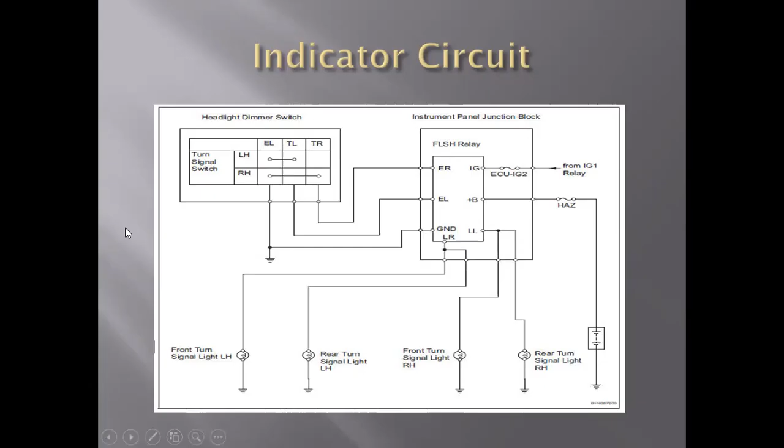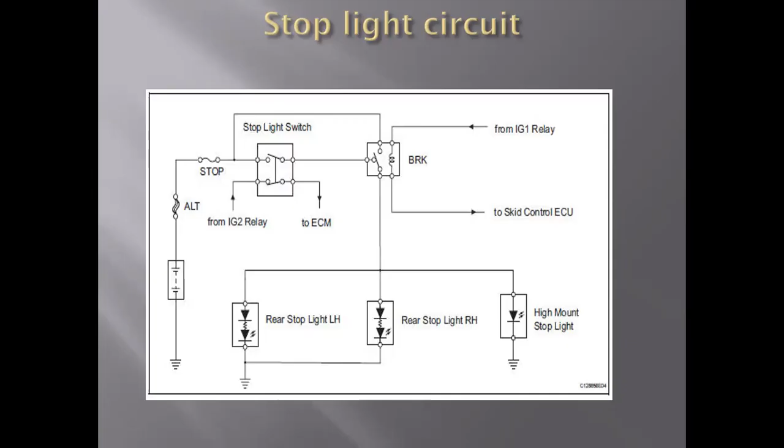Right? So this circuit and this system also helps with the anti-skid control unit, and the transmission for shift lock control.

So you see shift lock control down here. So information goes to the ECU for shifting lockup and of course release, and also for the anti-skid. And like we said, it's also used for I-stop application.

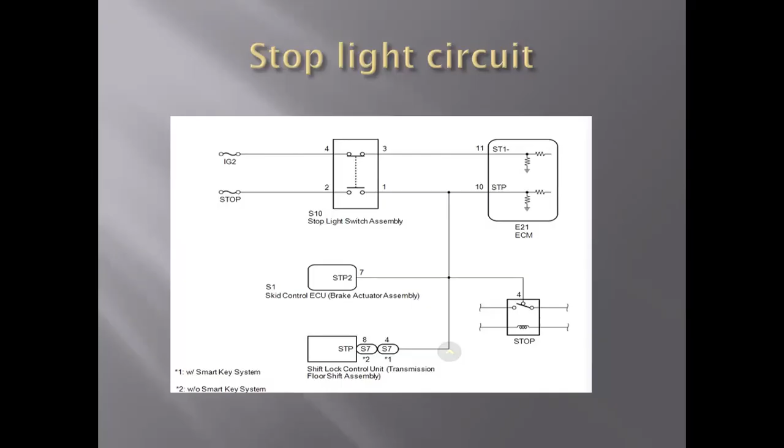Start and stop. I think it's the I-stop.

Okay, so this is your horn circuit. It's pretty much a straightforward circuit, just the same. You have your source, your main element, your control, and your output to the horn.

So for application with the supplementary restraint system, your SRS, more commonly known as the airbags, then you will have the horn.

Coming through the spiral, the horn circuit coming through the spiral. So this is where you would do that check.

Check to see if the problem is downstairs or upstairs. So right here is your horn button, horn switch, coming through the spiral cable and going to the relay.

So if you block this out, once you apply this, once you press it on, then you should get on this leg of the thing.

So like I was telling you, with the different types of relays, this number you have 1 and 2, and you have 3 and 5 as to the other relay. So this would be your input to the relay from the spiral.

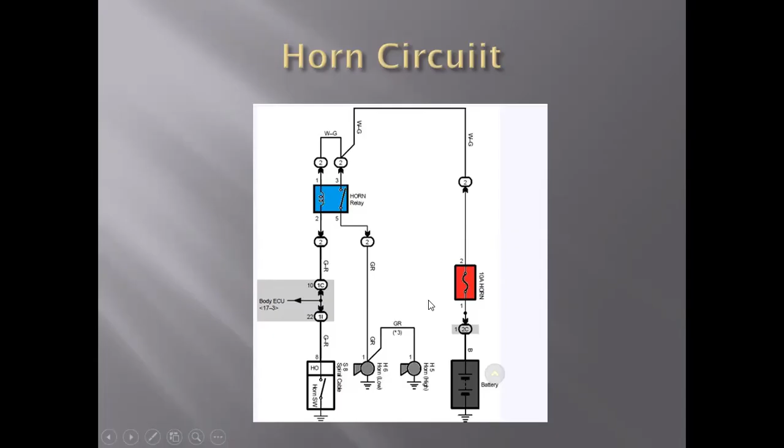Like previously with the alternator system, the starting system is pretty much the same. So the voltage drop across is the same.

It's to investigate any possibility of high resistance within a circuit or a group of circuits or a number of circuits.

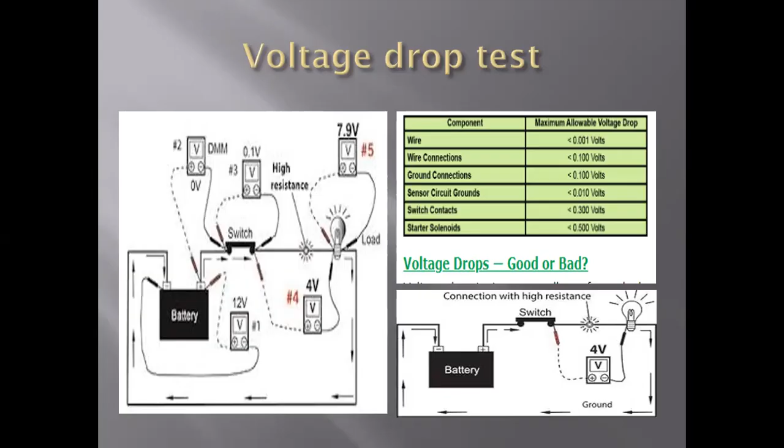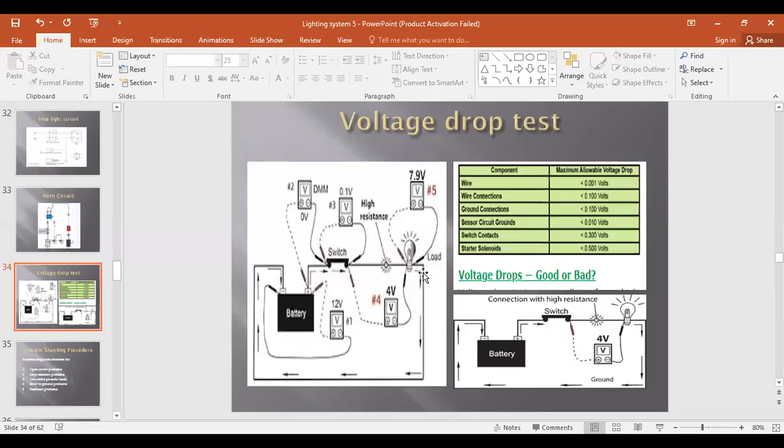I don't think these are right because them have volts. Bring this up for me. I want to see clear with that volts, with them volts. Yeah, yeah, and follow you. Okay, so is my eyes not working good?

It's perfectly okay. So this is 100 millivolts, right? For ground connection it's 100 millivolts. For sensor circuit ground, it's 10 millivolts, just the same. For switches, switch contacts is 300 millivolts, and for starter solenoid it's 500 millivolts.

And of course, like we said, you would also have to check the specific recommendation for the specific application.

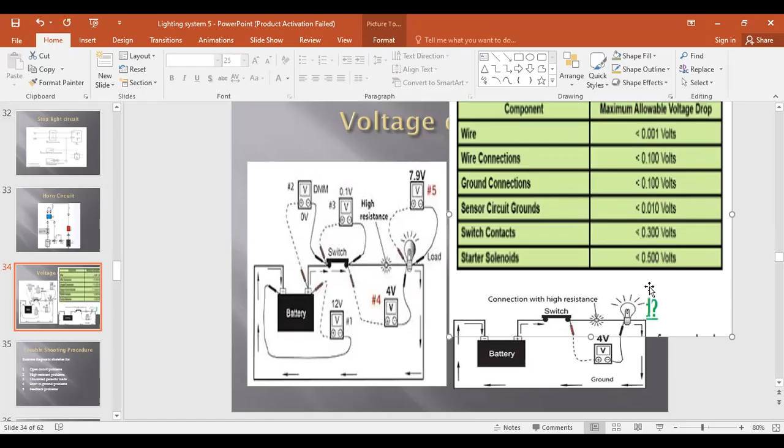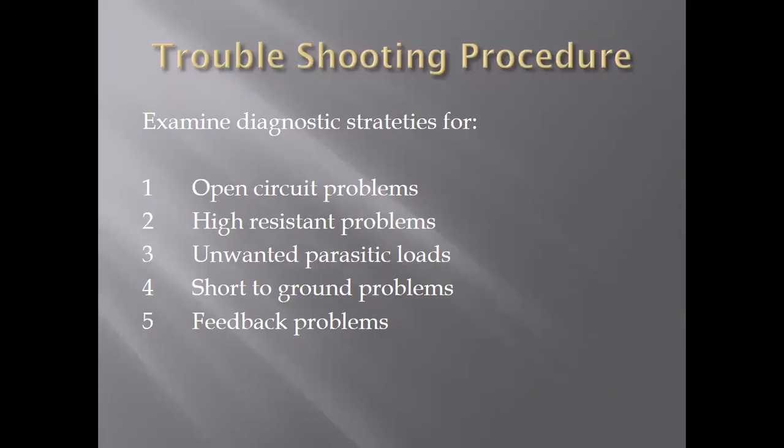All right, so for the troubleshooting procedure, examine the diagnostic strategy for open circuit problems, high resistance problems, unwanted parasitic loads, shorted to ground problems, and feedback problems.

Okay, so what this essentially tells you is that first you must verify the customer's complaint, right? So you will have to do a test to ensure that what the customer is explaining to you is what is actually happening, because sometimes...

All right, so first we verify the customer complaint, and then we determine the related symptom. We then analyze the symptoms, and then we isolate the trouble, correct the trouble, and then we check for proof of operation.

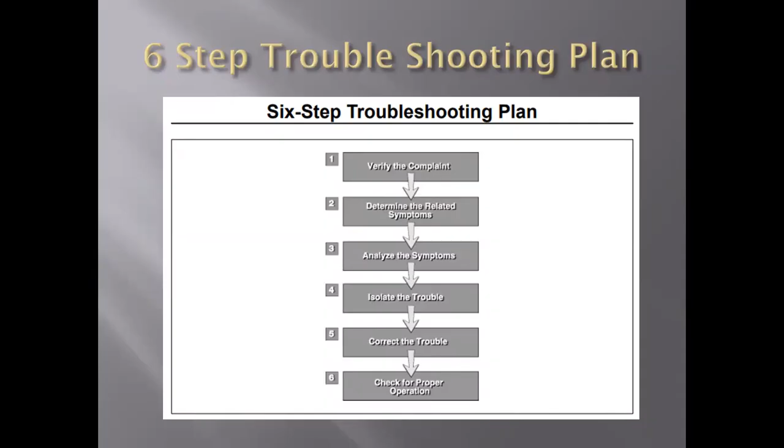The objective is to determine what needs to be done to verify the problem, check the component for related symptoms, use circuit trace technique to analyze symptoms to determine problems for diagnosis, use EWD to isolate the problem, and use repair techniques for wire, terminal, and connectors.

Step 1: Verify customer complaint. Identify what the customer is describing. Is it a problem? Is it intermittent or continuous?

Sample customer complaint: stoplight does not work. Step on the brake pedal and look at the brake light. The problem happens every time the brake pedal is depressed.

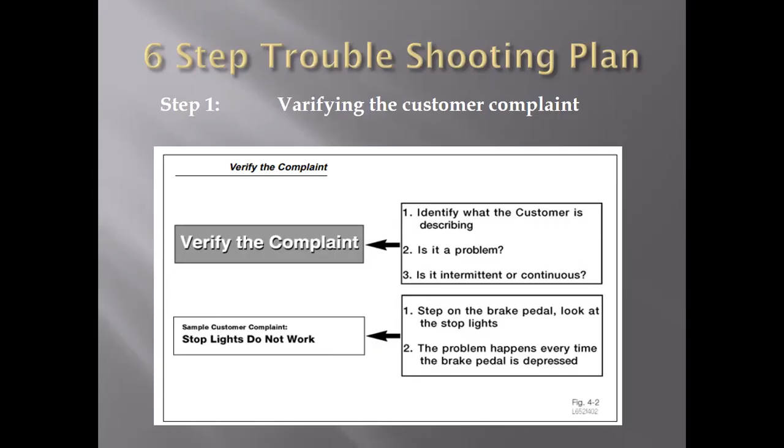Step 2: Determine the related symptom. Most electrical circuits consist of two or more loads connected in parallel. Different circuits are related to another circuit by parallel connection to a common power source, fuse, or ground point. Check sensors or switches where a single switch operates a number of different circuits, such as the left front door courtesy light operating both the interior lighting and the key warning buzzer circuit.

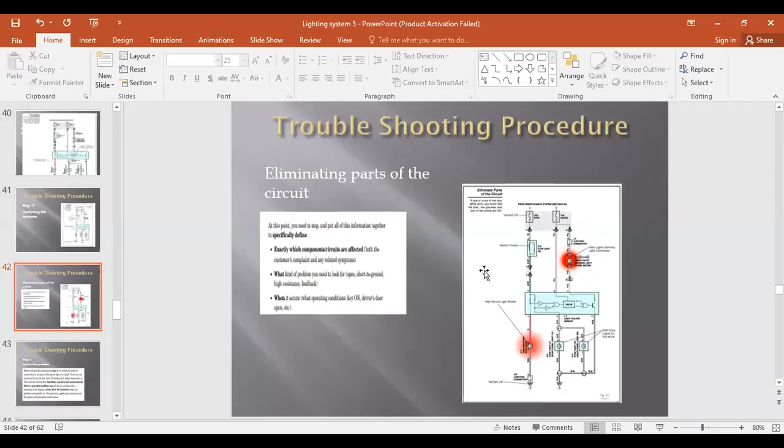Isolate the problem. When analyzing the symptom in step 4, you trace the path of current flow in the parts of the circuit that are good. You will now see sections of the circuit that have no trace on them - places where there is no confirmed current flow. Anywhere you have no trace current flow is the potential problem area.

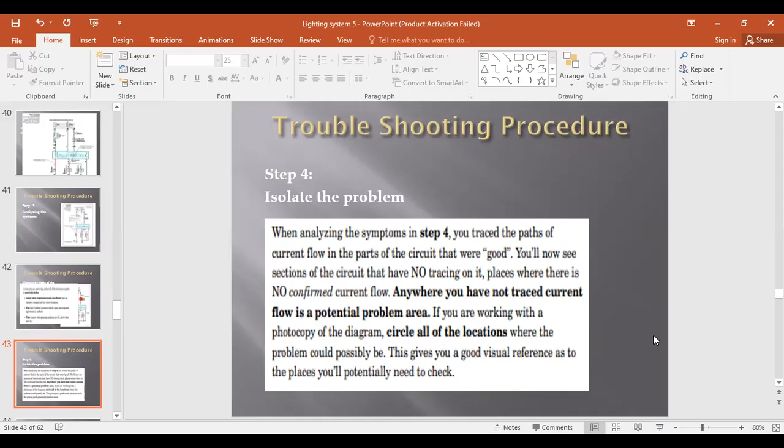If you're working with a photocopy of the diagram, circle all the locations where the problem could possibly be. This gives you a good visual reference of the places you will potentially need to check. Basically, you're going to look at the diagram and trace it for the problem area, pinpointing those areas. Look for connection numbers, look for color wires, and trace all the way through to the end, checking for any deviation in the voltage or the source at that point.

To isolate the problem, there are three actions you need to make: one, on the wiring diagram find the areas that are possible problem areas; two, determine where to begin making the checks; and three, make your inspection.

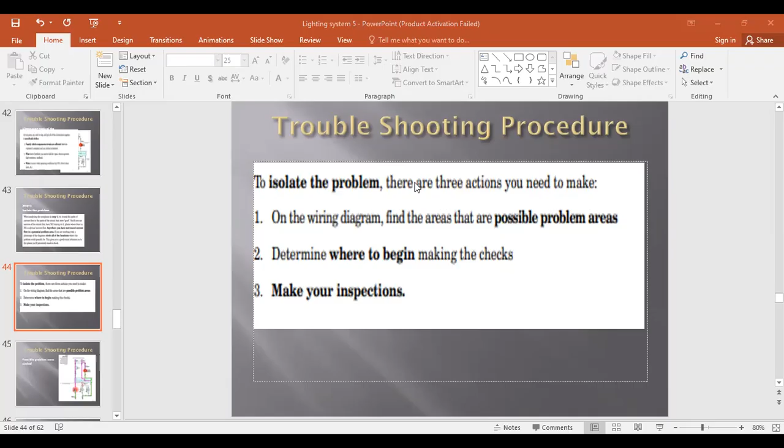Troubleshooting procedure, step 5: correcting the problem. This may be repair or replacement of components, wiring, service connections, or connectors, terminals, and ground points.

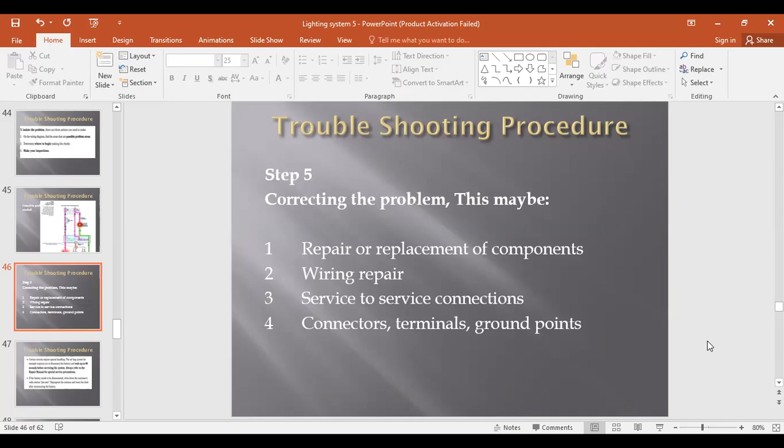Certain circuits require special handling. The airbag system, for example, requires you to disconnect the battery and wait up to 90 seconds before servicing the system. Always refer to the Repair Manual for specific service or special service precautions.

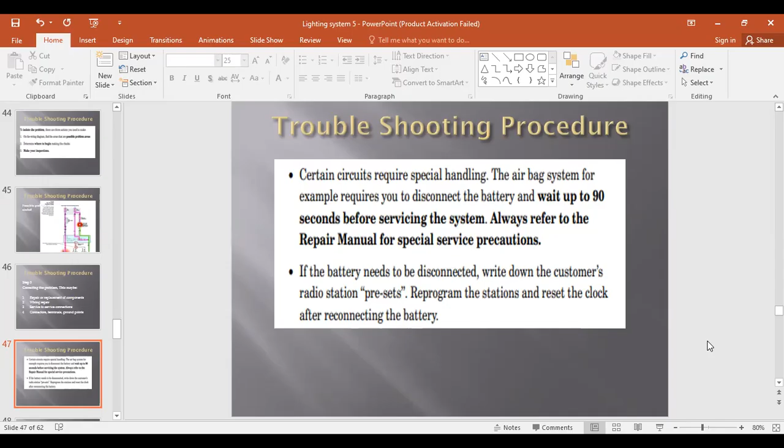If the battery needs to be disconnected, write down the customer's radio station presets and reset the clock after reconnecting the battery. I would strongly recommend that before disconnecting the battery, you check to see if the radio has any security or coding feature you will need, or you might need to add a power source to maintain that before disconnecting the battery.

After making the repair, you must verify that the problem was actually fixed. Operate the circuit as thoroughly as you did when you first looked at the car, making sure all the functions and features of the circuit are working properly. Sometimes a circuit has a simple problem; sometimes it has multiple problems causing it to be complicated. This recheck of the circuit ensures that the customer will be satisfied. A satisfied customer means they will return to the dealership for service and tell their friends about the experience too.

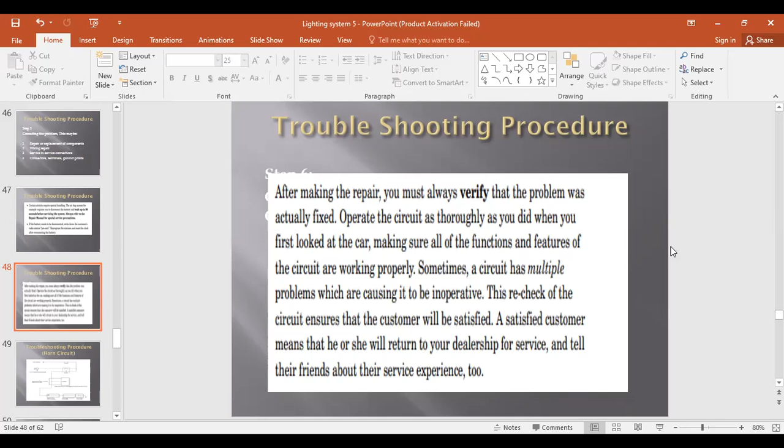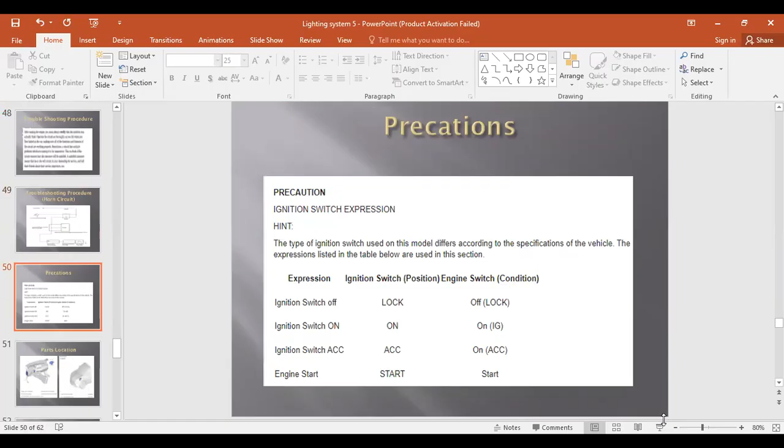Precaution: ignition switch expression. The type of ignition switch used on this model differs according to the specifications of the vehicle. The expressions listed in the table are used in this section: expression, ignition switch position, engine switch, and condition. For ignition switch off, the steering is in the lock position, and the engine switch condition is off.

Ignition switch on, steering lock on - expression is ignition switch on, engine is ignition on. For expression ignition switch accessory, accessory is on for engine. For startup, engine start - engine condition is engine start.

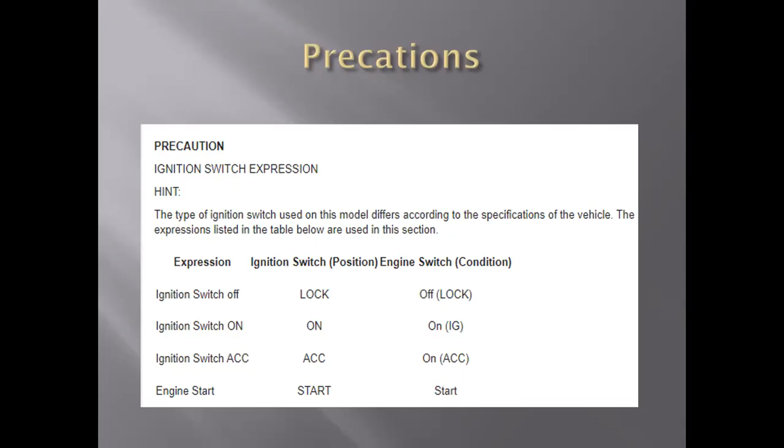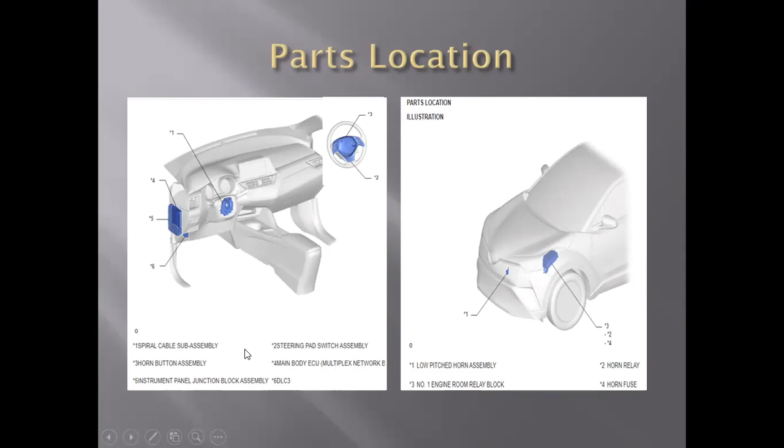There are some parts locations. For one, we identify our spiral cable subassembly. Two is your steering pad switch assembly, and three is your horn button assembly. Four would be your main body ECU, which is your multiplex networking, and five would be your instrument panel junction block assembly.

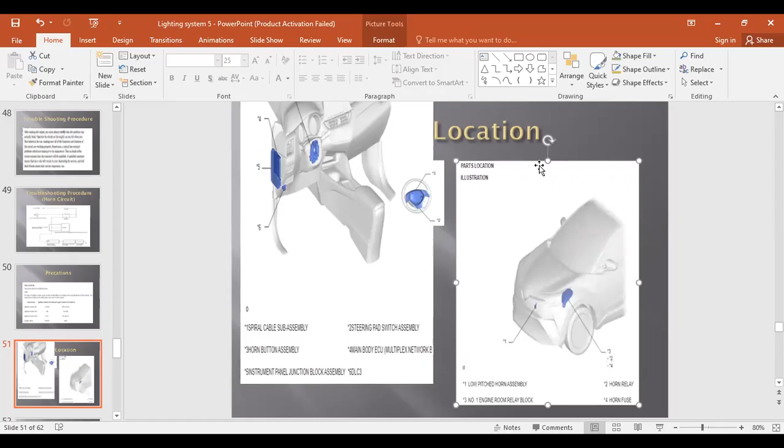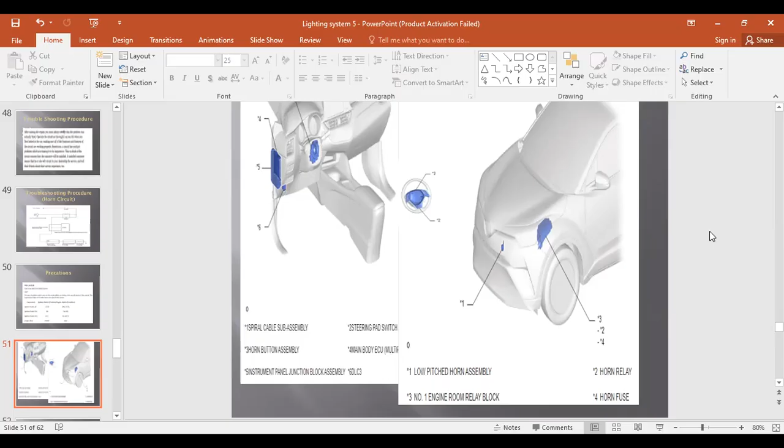On the other side now, we have the low pitched horn assembly, and two is your horn relay, three is your engine room relay block, and four is your horn fuse, which is incorporated inside the fuse box.

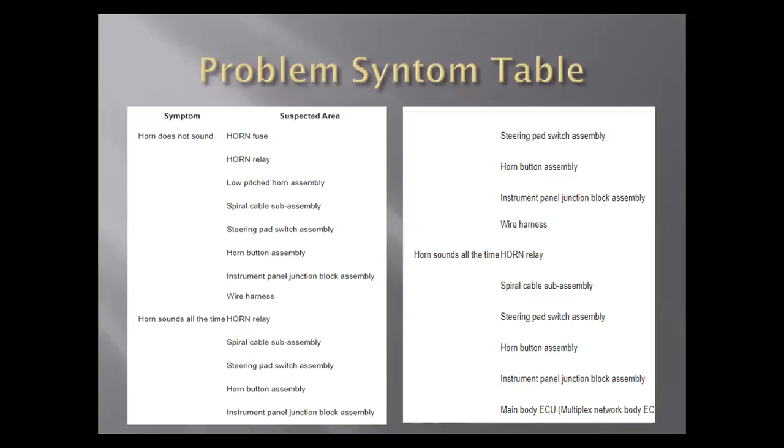Okay, so symptom and suspected area: if the horn does not sound, it could be fuse relay, low pitched horn assembly, spiral cable, steering pad assembly, horn button assembly, instrument panel junction, block assembly, or wire harness.

If horn sounds all the time, it could be a relay, spiral cable, steering pad, horn button assembly, instrument panel junction block assembly, sub assembly, switch assembly, main body ECU, or multiplexing network body ECU assembly.

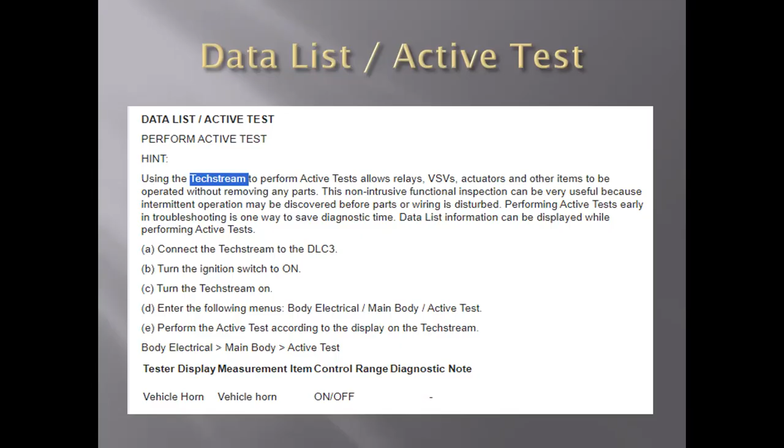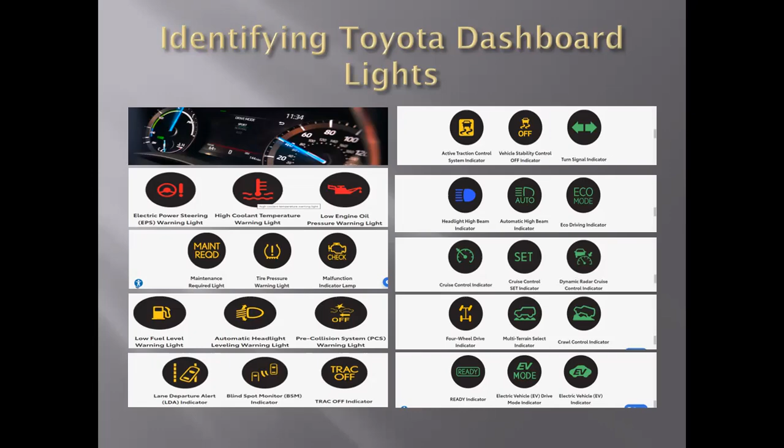It's a basic you want to add anything else. Yeah. So, you want to see.

Evening, everybody. These last set of slides was not necessarily designated for this class, but nonetheless, in case we have some real beginners in the class, just make sure to put them up there. So if you see something there that you're not clear about, you could make mention of it.

However, City and Guilds does not require you at level 1 and 2 to do a practical for this exam. However, we do, because we want to make certain that we cover the fundamentals of circuitry and lighting systems. But notice a lot of the circuits we've been using are basic circuits, and it's not necessarily the circuit, but your ability to test the circuit that is being assessed. So we are going to be designing practicals, not this Sunday coming, but the following Sunday, at 32 Oak Road.